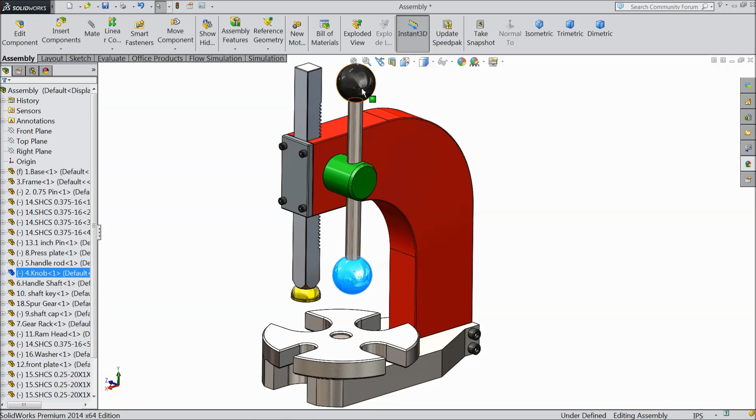This is the widely used manual press machine. We will design each part and assemble them at the end of the video. Let's see how to do this in Solidworks. You can also find the JPG file on our Facebook page. So let's do it.

Here we will make the first part, the base for our Arbor Press. We will select the top plane, sketch, draw one construction line and make sure it passes through origin. Select line, connect with this, exit. Now we will assign the dimension.

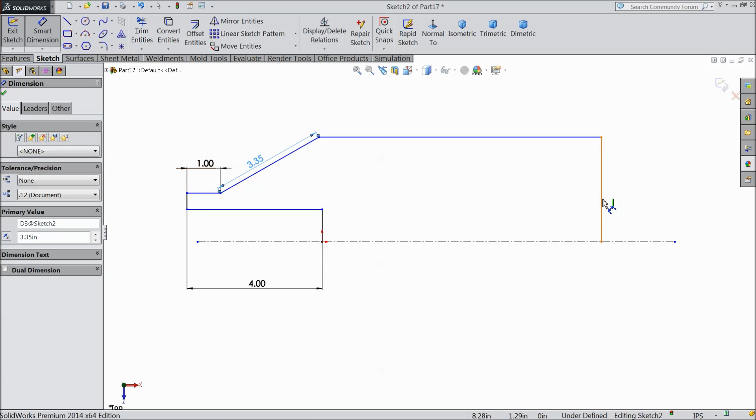Our dimensions are in inches. Make 1 inch, 4 inch, 3.35 inch, and the distance from here to one end 11.75 inch, and the distance from here to this line 3 inch, and the distance from this point 1 inch, and this distance 1.5 inch.

Now select circle and draw one circle here. Select a line, connect with this line, exit. Now choose trim entities and trim this portion.

Now let's assign the dimension. Keep 1 inch and this radius select 1.25 inch. Select trim entity and delete this line also here.

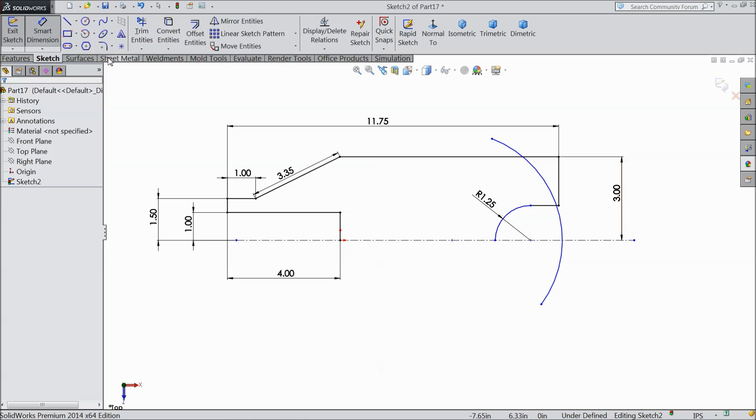Now select circle and draw one more big circle, or cancel it and choose center point arc here. Now draw an arc from here, exit. Now assign the dimension. The gap between these two is 2.5 inch and keep the radius 4 inch. Now trim this outer part. Now that's it.

Now select all the geometry, select mirror and select this line, and we want to make a mirror, so select OK. Now this body is going to be mirrored.

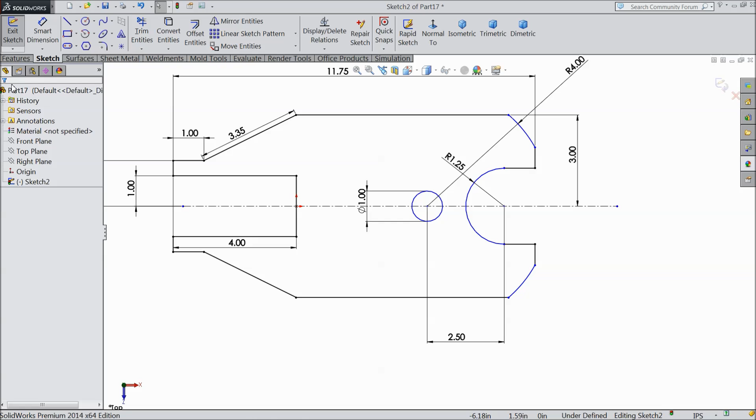Select circle and draw one circle here and make the diameter 1 inch. Now this distance from here is 1 inch. Now our geometry is fully defined.

Select extruded boss and extrude up to 1.5 inch.

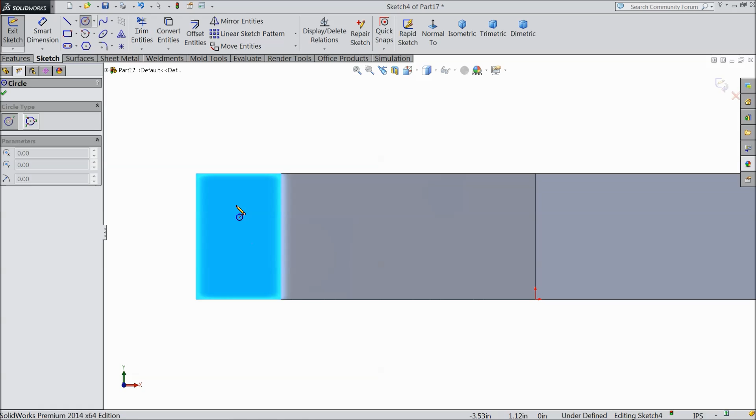Now select this face, sketch normal, and here we want to create some circles. First draw a center line. Now let's assign this circle: .35 inch, and the distance from here 0.5 inch, and the diameter keep 3/8 inch.

Select mirror entity and mirror this circle about this construction line. Now select extruded cut and select through all. Okay, we will select some chamfer, .01, select this face, this face.

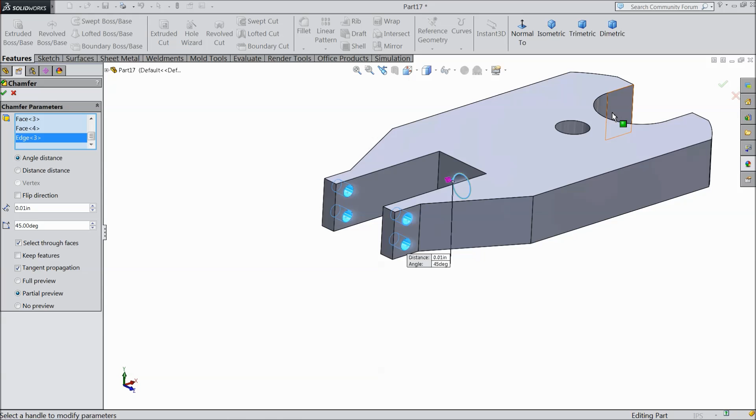Now our first part is ready. This is the Arbor Press base. We will assign some material like let's do it, brushed steel. Now save as. Go to desktop and create a new folder and name it Arbor Press.

Arbor Press Machine, and save as first part base. Okay, let's go for the next part.

Now we will sketch the 0.75 inch pin. So we will select front plane, sketch, and draw a circle and keep the diameter 0.75 inch. Extrude it up to 1.5 inch. And make chamfer 0.05 inch and select both the ends.

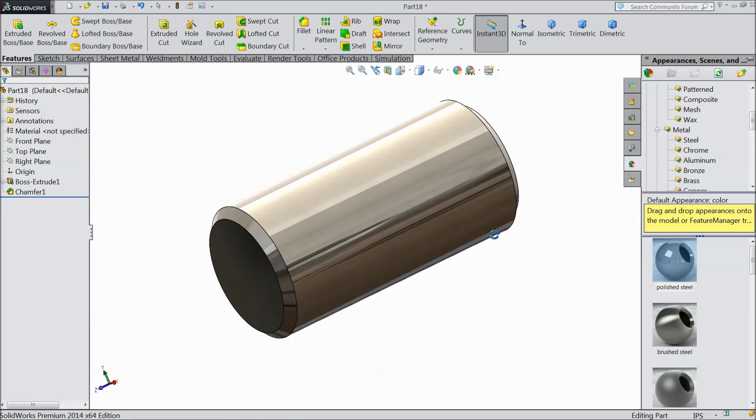Let's assign polished steel for the whole body. This is the pin for the Arbor machine. Now save as .75 inch pin. Okay, let's move to the next.

Now we will sketch the Arbor Press frame. Choose front plane, sketch, select a line and start from the origin point, now exit. Let's assign the length and height, everything.

Keep 14-inch height, 11.25-inch width, 4-inch width, and here also 4-inch. Now choose fillet, keep radius 6-inch and select this end. Now change to 4-inch and select this end.

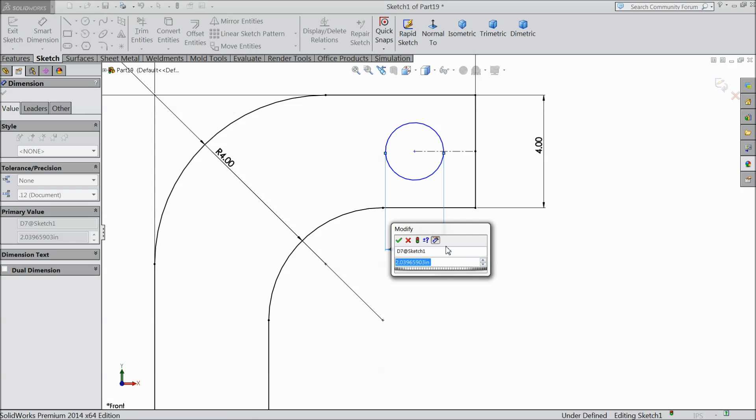Select circle. Draw a circle, select center point and connect it from midpoint. Exit. Now select this midpoint and make relation horizontal. Keep the diameter of the hole 1.63 inch and the distance from here to one end 1.686 inch.

Now select extruded boss and choose mid plane here, and extrude up to 2 inch.

Now select this face, sketch. First draw a center line. Exit. Now choose corner rectangle and draw one rectangle. Exit. Now select these 3 lines and make relation symmetric. Assign the length 0.01 inch and the distance from one end, by default, 0.5 inch. Select extruded cut, we want to cut inside up to 1.01 inch. Now see here.

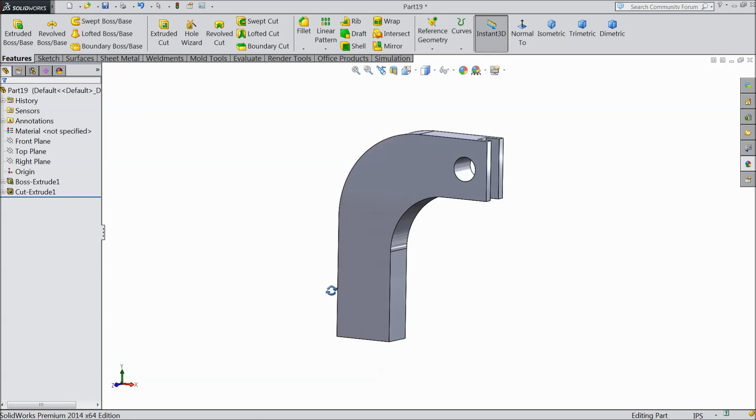Now we want to create some holes here. Select this face first, normal, and choose hole wizard. And here we want to create some hole. So choose straight tap here, inch, and this tapped hole.

And here we will select 1/4 into 20 size hole and choose blind and select 0. Blind inside select 1 inch and this one select 0.75 thread.

Okay, now choose position. Here we want, okay, now escape, press escape, assign dimension, .25 inch, and this height 0.5 inch.

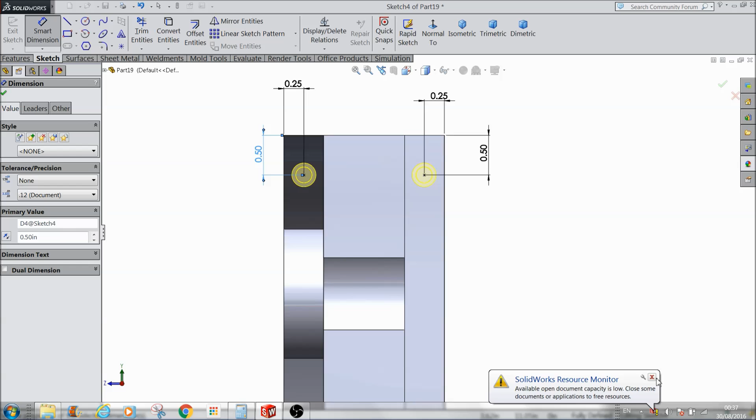Now the same as here also: 0.25, .5 inch.

Now select this face, sketch, select center line, exit, and we want to mirror this hole to another direction. So select, sorry, exit.

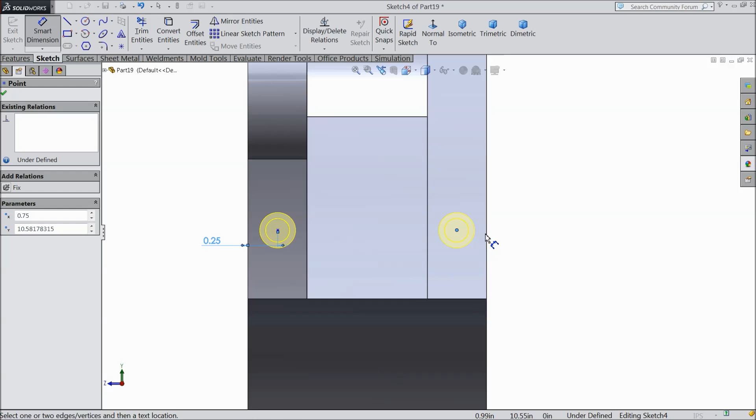Delete this line, or no problem if you can keep it as it is. Mirror. Or we will do one thing, just delete this line and edit this feature. Now go to location, and draw two more here, press escape, same also. We can use 0.25 inch, 0.25 inch, 0.5 inch.

Okay, now select OK. Now see the 4 holes here we created. Now the same as we will create here, select this face, sketch, normal, only select this face and choose hole wizard.

Now choose the same straight tap, inch tap, and here you have to select a little different, 3 by 8 inch, 3 by 8 inch 24, blind, choose through all. Here select through all, position 1 2, escape.

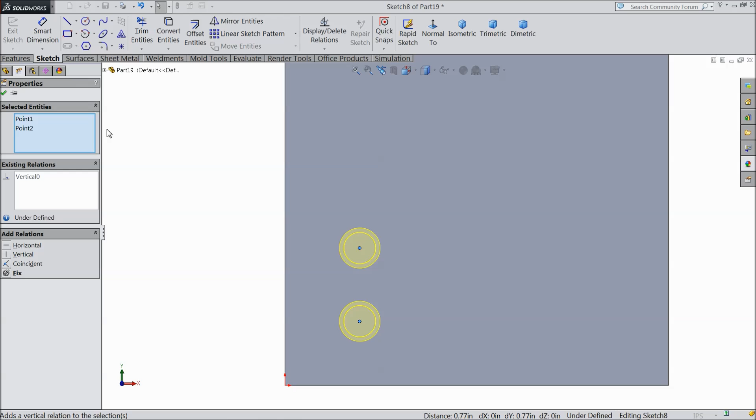Now let's assign dimension, escape first, select this center point and this center point, same vertical. Now assign the distance from this point, 0.5 inch, and the distance from here to here, 0.35 inch, and this distance 0.8 inch. Something went wrong, that's why this pop-up coming.

Select OK. Now see the holes created here.

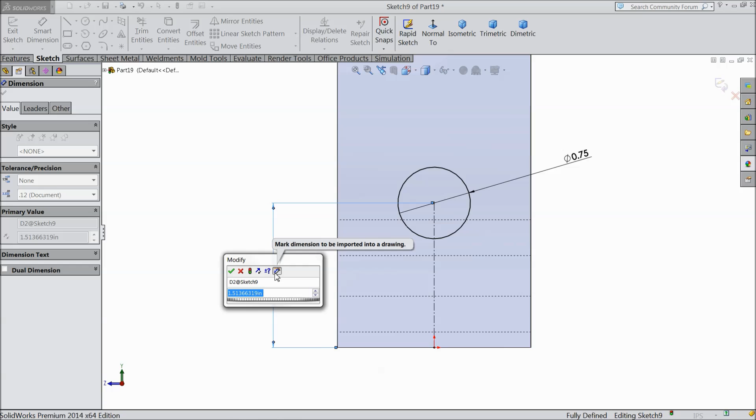Now we want to create a hole here, select this face, sketch, normal, select circle and draw a circle, connect one line with origin point, select this line and make sure it is vertical, 0.75 inch, and the distance from bottom line 0.75 inch.

Select extruded cut up to inside 0.75 inch. Okay. Now choose chamfer, select 0.05 inch and select this face, the same as opposite direction. Select OK.

Now this is the frame for Arbor Press. Let's assign the color. Select the body. OK. Now this is the press. Now save as frame. Okay, let's move for the next part.

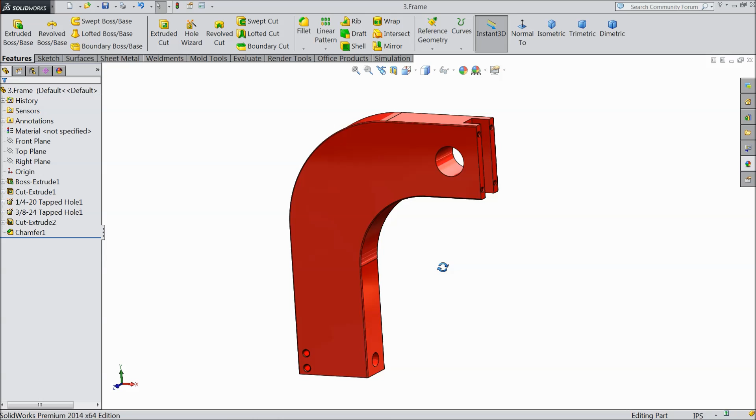Now the next part is handle knob. So choose front plane and draw a circle. Actually select center point arc and draw a half circle. Exit. Choose line and connect it and assign the radius 1 inch. Select revolve boss base and select this line as axis.

Okay. Now again choose front plane and we want to create a plane, so select this upper face. It will be tangent to this face. Okay. Now select this plane, sketch, and draw a circle here and keep the diameter 0.75 inch. Okay, and extrude up to inside 0.75 inch. Okay.

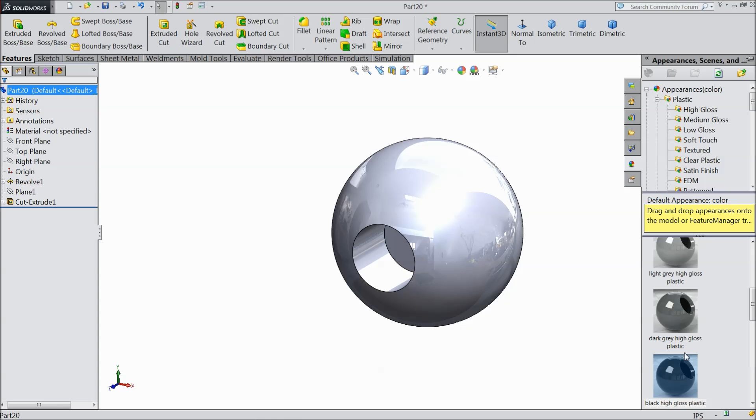Now hide this plane. Now we will assign black high gloss plastic for this knob. Now save as knob. Let's move for next part, handle.

Let's make handle rod. So choose front plane, sketch, and for rod create a circle and keep the diameter 0.75 inch. Okay, and let's extrude and choose mid plane and we want 10-inch long rod. Okay.

Now save this rod. We will assign some metal finish. Okay, polished steel or brushed steel, better. Now save as part number 5, handle rod.

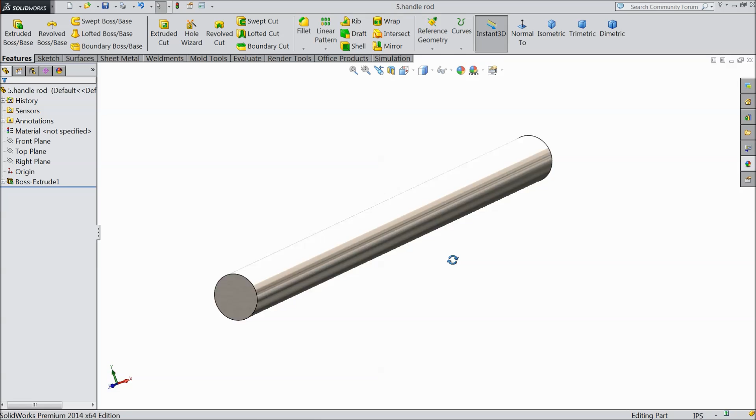Okay, let's move for the next part. Now we will make handle shaft. So choose front plane, sketch, select a line and start from origin point. And connect it again up to origin, exit.

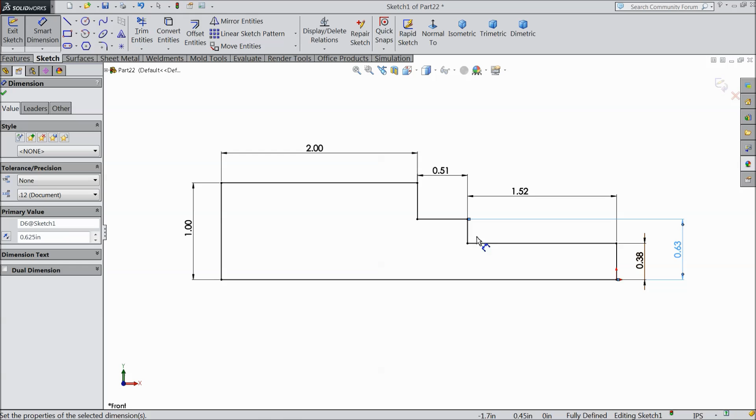Now let's assign the height and width everything. Make 1 inch, 2 inch, and this 0.51 inch, 1.52 inch. This height 0.375 inch, and this height 0.625 inch. Okay, now our geometry is fully defined, so select revolve boss base.

Okay, now choose chamfer 0.125 inch and select this end. Okay, we need one more chamfer 0.05 inch and select this end. You can choose fillet 0.015 and select this inside circle. Okay.

Now again choose front plane, sketch, and here we want to create a hole, so draw a hole and keep the diameters 0.75 inch, 0.75. Okay, and select the hole center point and origin point and make a relation horizontal. Now select extruded cut, and here we will select through all both. See, okay, now the hole is created.

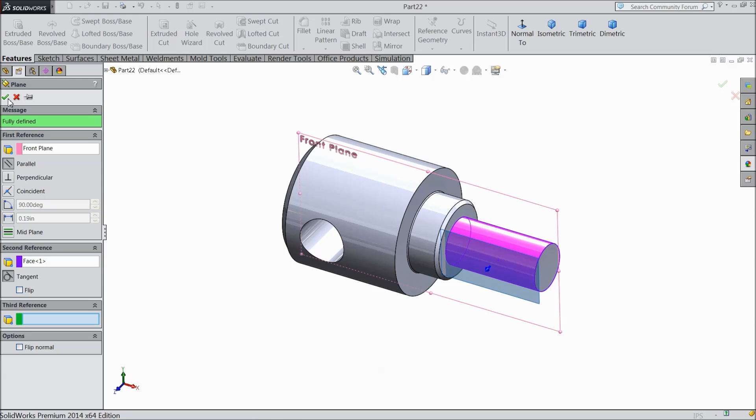Now we will select front plane, choose plane and select this axis, make parallel. Okay, now here we want to create a slotted key, so choose OK.

Now select this plane, sketch, normal. First draw a center line up to this line. Now select here a straight slot, make one slot. Okay, now select this outer line and this slot, this tangent.

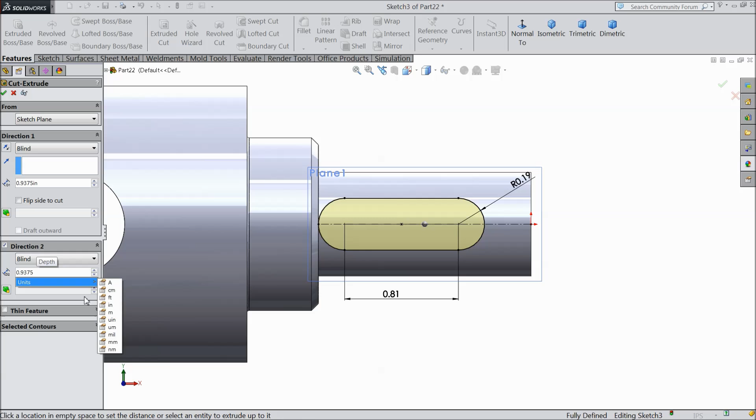Now we will define the length. 0.8125 inch, and this radius 3/16 inch. Okay, now select extruded cut, 0.9375, and direction 2 also the same, 0.9375 inch. See,

it is actually 0.09375 inch. See, you can see it here. Okay, now see this is actually slot for key. Now choose fillet 0.015 and select this circle. Okay,

now hide this plane, and we will assign some color. Okay, this color better. Now save this part number 6 as a handle shaft. Okay, let's move for the next part.

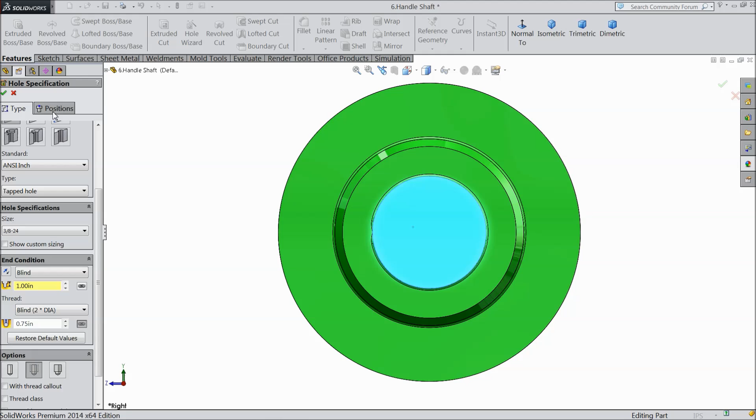We forgot to add some hole here. Select this face and go to hole wizard. Select straight tap, inch, hole, and here 3/8-24 inch. Okay, and blind, choose blind 0.75, and here select blind, select 1 inch. Better. Select position and choose center. Select OK. Now see, a hole is created. Now save this.

And we will do some editing here. This extruded cut, edit, and select this radius, and this one divide by 2. Okay. Exit. Now see, this is our small slot, not that much big. Now save as. Now our handle shaft is perfect. Let's move for the next part now.

Now we will sketch the gear rack. Choose the right plane, sketch, select center rectangle and draw one rectangle, keeping the length, height and width 1 by 1 inch. Select extruded boss and extrude up to 10 inches.

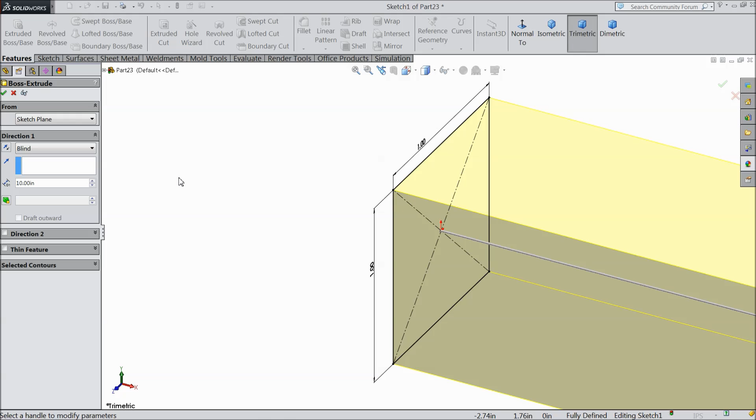Select OK. Now choose chamfer, 0.03, and select all 4 faces. Okay.

Now select this face, sketch normal. Here we will create some gear teeth. Choose a line and connect up to here. Select center line, exit. Now select these 3 lines and make relation symmetric. Now let's assign some dimensions.

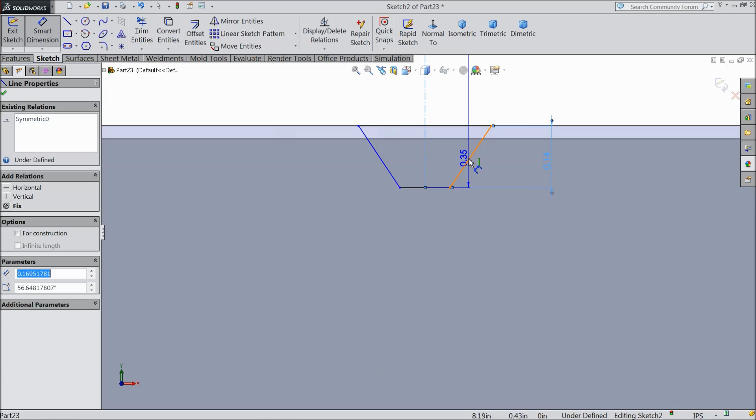Height, make it 0.1416, angle 14.5 degrees. Choose radius 0.02 and select this end and this end.

Now this is selected. The geometry is not fully defined, so we will add some more relations. This point to this point, make sure it is horizontal. Now let's assign the gap, 0.0708, and keep the length 0.1079 inch.

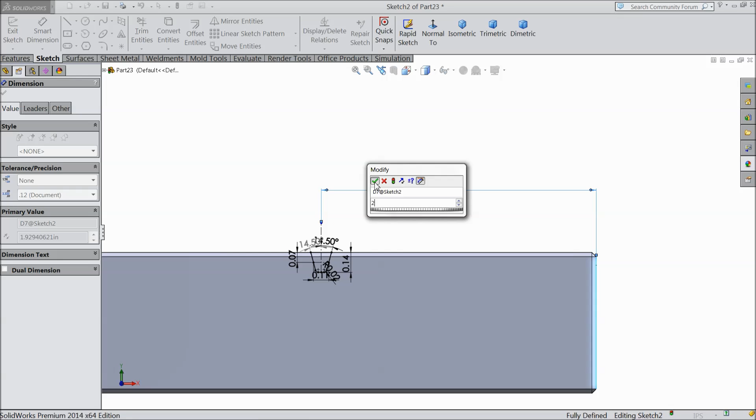Select OK. Now assign the distance from here to the last point, keep 2 inches. Now our geometry is fully defined. Select extruded cut and choose through all. See here, okay.

Now select this last cutout and choose linear pattern. Select this as an axis. Assign the distance 0.19635 inch and total 41 number of threads we want. See, there is a small gap between two threads.

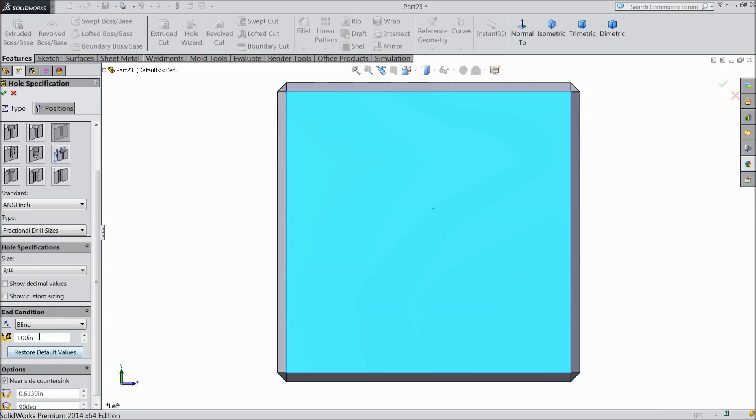Now we will do one, then select this face, sketch, only select this face. Here we want to make some hole. Go to hole wizard, choose hole and fractional drill size 9/16, blind, keep 1 inch, and select midpoint. Okay. Now see, the hole is created here.

We will do one more editing. We will just increase the length here, up to 12 inches. See, okay. Now that's fine. Now select this face, normal.

No, select the top face, normal, hole wizard, choose straight slot and tapped hole, size 1/4-20 inch. Go down and end condition choose up to next. Select position, make sure it is parallel to the origin point.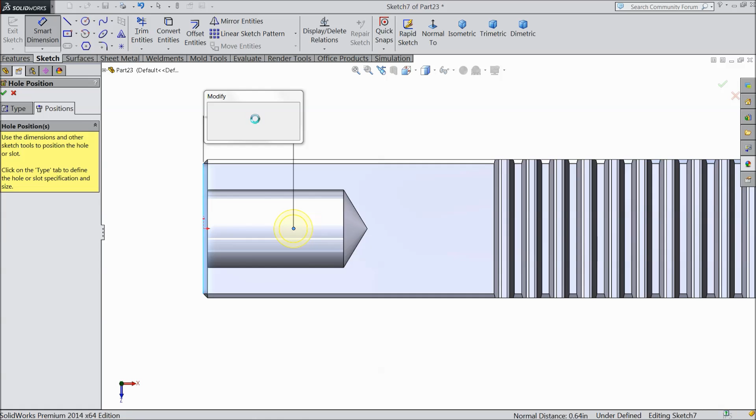Just escape and choose dimension, 0.5 inch. Select OK.

Now choose front plane, sketch normal, select a line, okay. Now select this line and this point, or better drag down, make this relation.

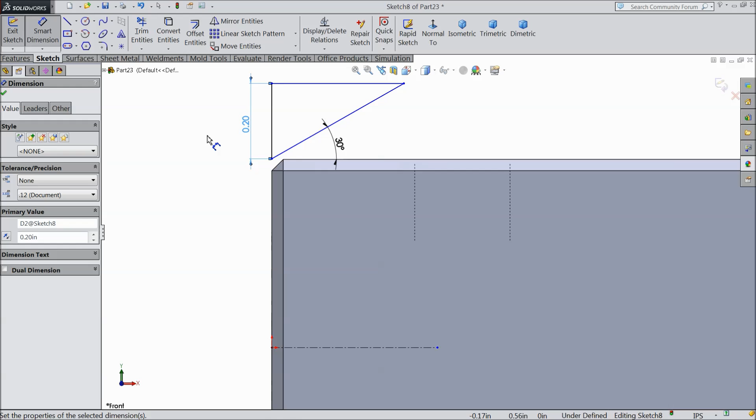Draw one center line. Now assign the angle between these two lines, 30 degrees, 0.2 inch. Now select revolve cut, with this line selected as the axis. Okay. Now see, it is created.

Now just select chromium plating. See, this is the gear rack for Arbor Press. The press will move up and down through this gear rack. Now save as gear rack. Okay, let's move to the next part.

The next part is the press plate. So choose the top plane and draw two circles, keeping the inside circle as construction geometry. Now assign the diameter: outer diameter 8 inches and inside 5 inches. Okay.

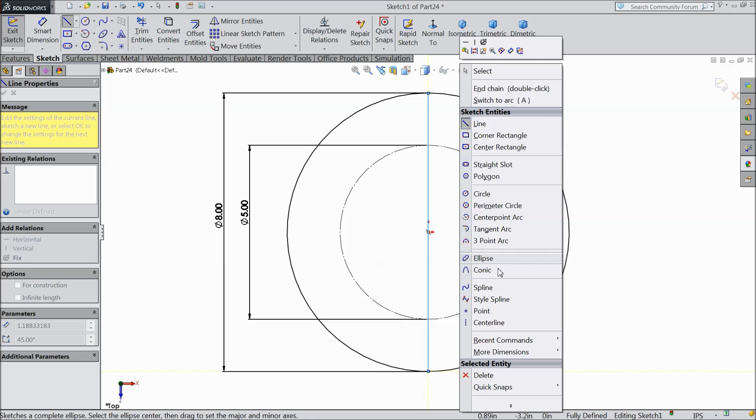Now select line, construction line, connect one end to this end, make sure it is construction geometry, the same as horizontal also. Now choose circle.

Now in every 4 corners define different sizes of circles; every circle has a different dimension. This circle keep diameter 2.5 inches, 2 inches, and the other one 1.5 inches, and this last one 1 inch. Okay, and define: select circle, draw a circle at midpoint, and this also keep 1 inch.

Okay, now choose a line and select this point and connect with it. Choose mirror entity, select this line and mirror about this line. Now here also draw a horizontal line up to this circle. You can mirror or you can sketch also by line.

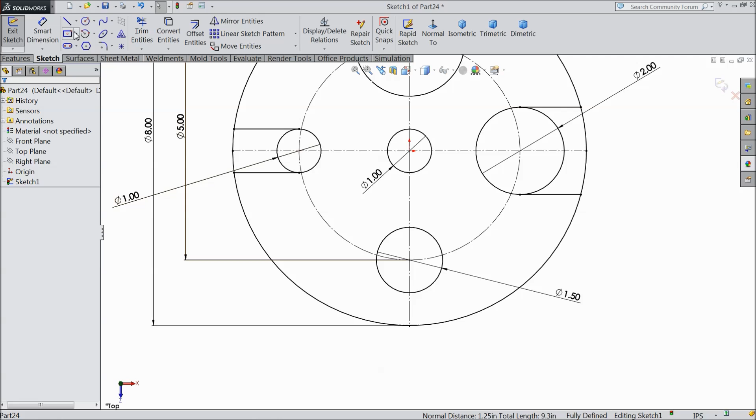Here also we will do the same thing, and the last one at the bottom. Connect with the circle and select both lines and click only mirror entities. Now see, it is automatically connected. Now choose trim entity. Now we are going to trim all the unnecessary things, we don't want this all. The same as upward. Okay.

That's it. Now select extruded boss and extrude up to 1 inch. Okay. Now define chamfer, select upper face and bottom face. Okay.

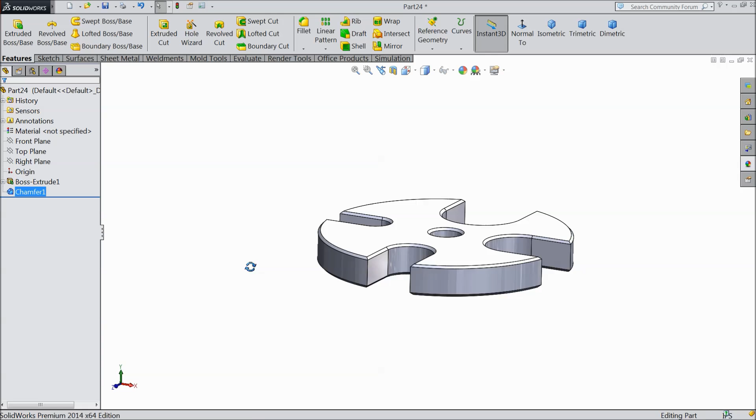Now we will assign some material: cast stainless steel. This is the cast stainless steel. Now save as part number 8, press plate. So this is the press plate. We will see how to assemble during assembly.

The next part is shaft cap. So choose front plane, sketch, select a line and start just below the origin point.

Exit. Now let's assign the dimension. First draw a center line, a horizontal center line. Make sure it's horizontal.

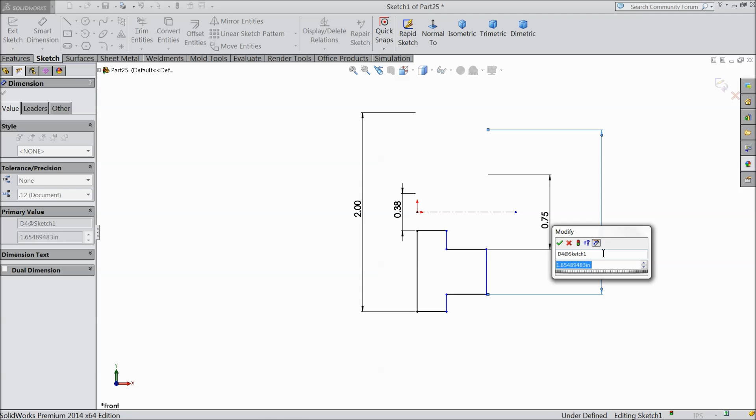Now overall length 2 inch, this length 0.375 inch. Now this length defined 0.75 inch, and the last one 1.625 inch.

Now 0.25 inch, and here bottom 0.375 inch, and the overall length, or cancel it, make relation collinear. Okay. Now our geometry is fully defined.

So select revolve boss base. Okay. Assign chamfer. Select this end and the last one. Okay.

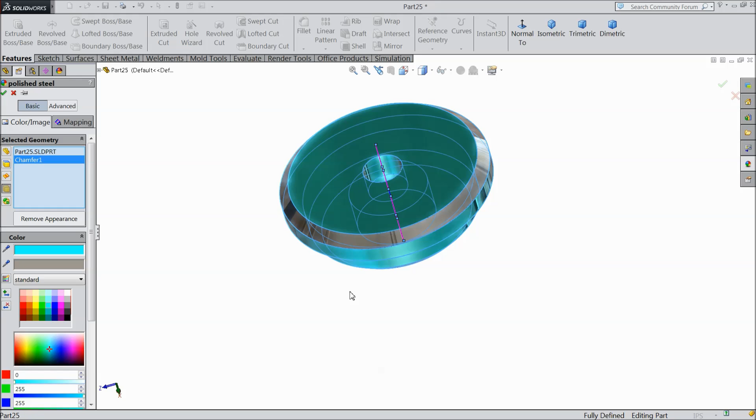We will assign polished steel for the whole body, and we will assign some different color.

Now save as shaft cap. This is, I think, part number 9. Now we will define and make the shaft key.

The next part is shaft key. So choose top plane, sketch, and here select straight slot. Draw a slot horizontal. Now select this line and make sure it is horizontal.

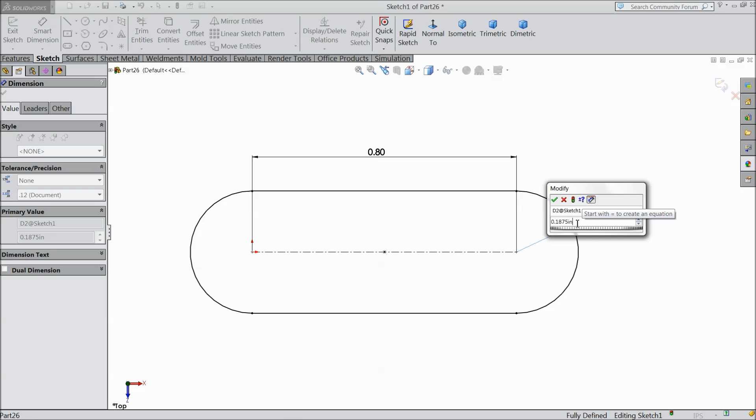Now define the dimension and assign 4 by 5 inch. And this one decide 3 by 16 inch. No, again divide by 2. That's it.

Now select extruded boss. Now extrude it 3 by 16 inch. Now this is better.

Okay. Now we will assign a small chamfer 0.005 inch. Select top and bottom face. Now select the whole body and define some color. That's it, orange color.

Now save this part as a shaft key, three by 16 inch. Okay, this is the shaft key.

Okay, let's move on to the next part. The next part is ram head. So choose front plane, sketch.

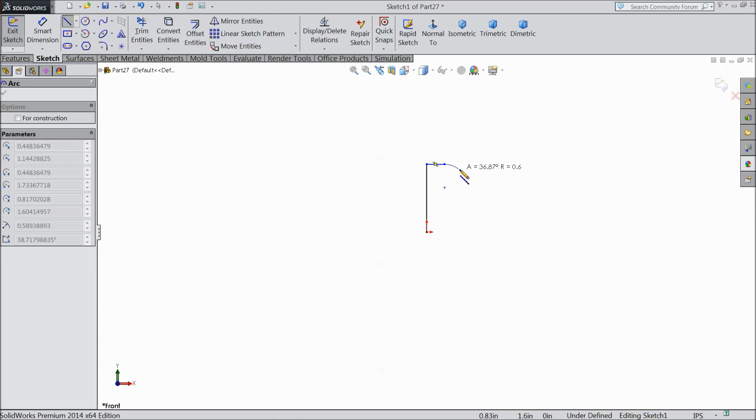Select line, go back and draw a circle, then a straight line down, and connect with this line.

Now here we will define some dimensions. Now select the length from here, or cancel it, select. OK. Zero, 0.75 inch.

Zero 0.263 by 2 inch. This one 0.5625 by 2 inch.

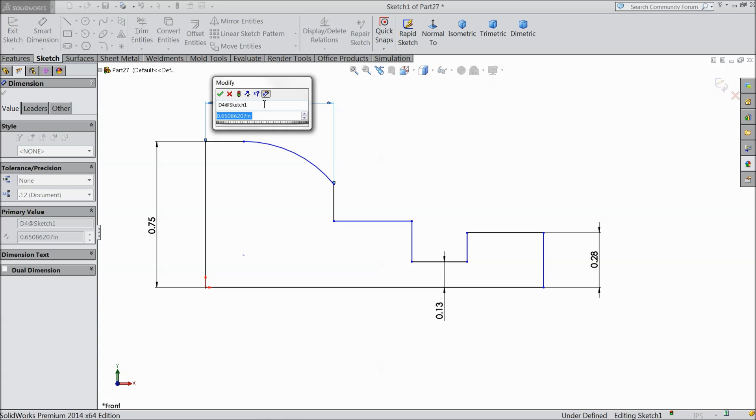Okay. Now this distance 0.625 inch. The radius also 0.625 inch. And the distance from here to this point 1 inch.

This distance 0.25 inch, and this one cancel. This length delete it.

Now first define this one 0.375 inch. Now distance from this end to this end 1 inch. Okay. Now select this line and make relation collinear. Okay. Now define this length 0.125 inch. Okay. Now our geometry is fully defined.

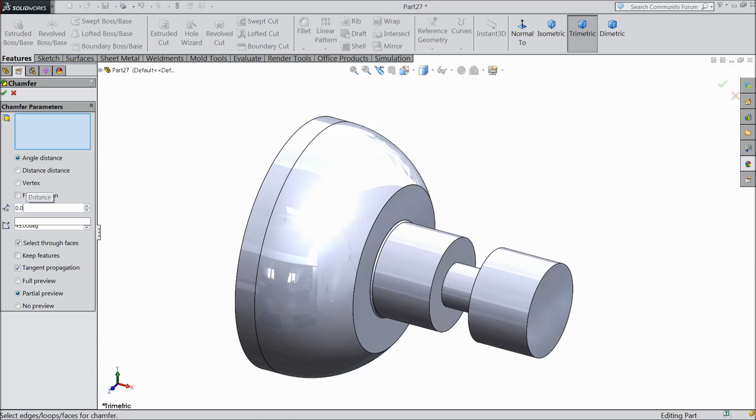So select revolve boss base and select this line as the axis. Choose chamfer, fillet, select this inside circle. Okay. Choose chamfer and select 0.05 and select this face. Okay.

Now we will assign some polished finish material and yellow color. See, it looks a very nice color. So this is the ram head for the press machine, Arbor Press.

Now save as ram head. Okay, let's go for the next part.

The next part is front plate. So choose top plane, sketch, and select here center rectangle. Keep the height 2 inch and 4 inch. Okay. Now select extruded boss and extrude up to 3 by 4 inch.

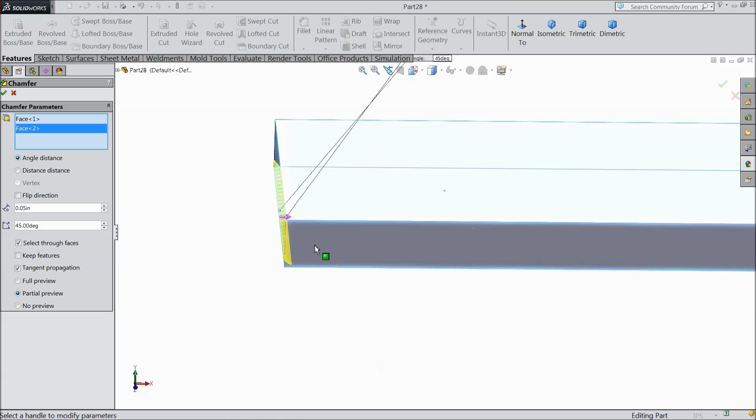Now first select chamfer. Select this face, and we will select all 4 edges. Okay.

Now see. Now select top face, sketch, normal. Draw one vertical line and one horizontal line. Draw a circle here.

Now define the distance 0.25 inch, 0.5 inch. The hole diameter 0.25 inch.

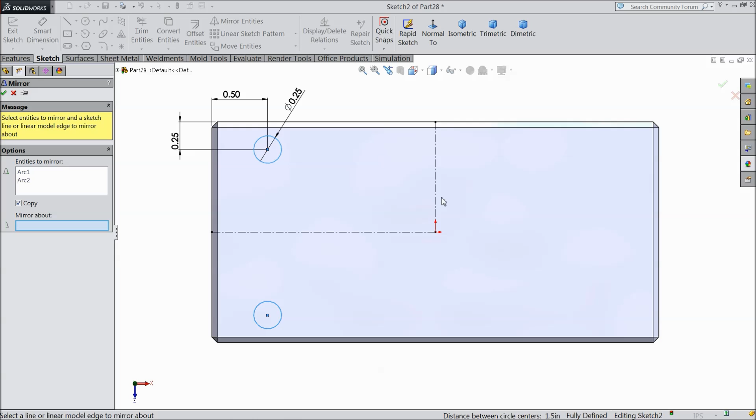Okay. Now choose mirror. Okay, again choose mirror. Select both the circles and mirror about this line. Select OK. Now select extruded cut and select here through all. OK.

Define some little dark color, not much dark, or define some plastic cover, polished plastic.

Now save as part number 12, front plate. Let's move for the next part.

The next part is 1 inch pin. So front plane, sketch, and draw a circle with 1 inch. Okay, and extrude up to 19 by 8 inch. It becomes 2.375 inch.

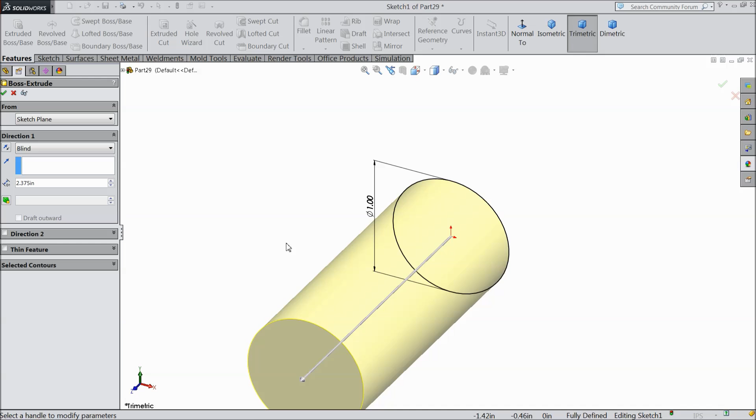Okay. Define chamfer 0.05 inch. Select this face. Okay.

Now assign steel and define the color black. Select the whole body. Okay. Now this is the 1 inch pin.

Save as part number 13, 1 inch pin. Let's move for the next part.

Now we will sketch one screw, a socket head screw. So select new and choose assembly.

And go to library, design library, and select inch, and in that go to bolts and screw and go down and select here socket head screw, and here select socket head cap screw.

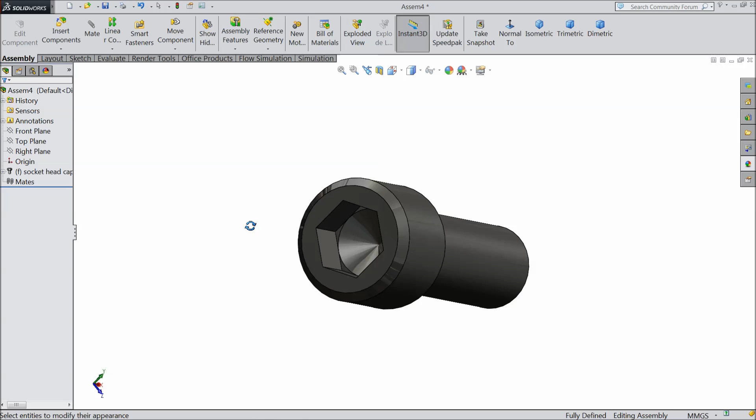Now we will save as, select here as a part, and this becomes part number 14.

Select here socket hexagon cap screw, 0.375 by 16 inch. Save. OK. Now cancel it, don't save.

Now we will sketch the next screw. Choose assembly. Cancel it and go to design library and select inch, bolts and screws, and select at the end socket head screw, and drag this socket head cap screw.

OK, and here we will select 1/4 inch 20. OK, length 1 inch, thread length also 1 inch. Select OK, select here no, and let's assign dark color to this body.

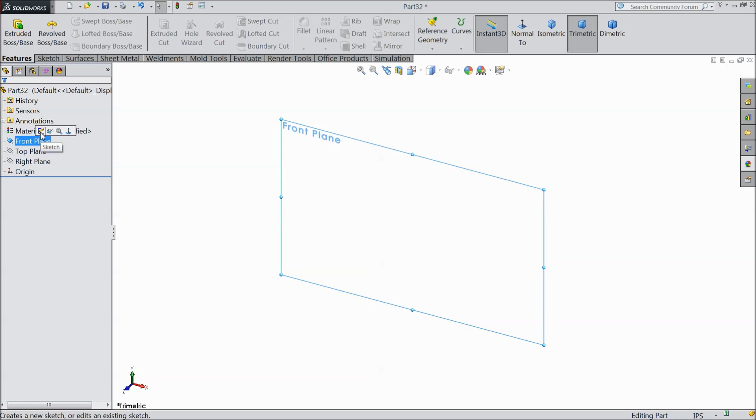Now the next part is washer. Select front plane, sketch, select corner rectangle. OK, select center line, make sure this line is vertical. Now let's assign the distance.

.812 inch, and the same this bottom also. Select yes. .406 inch, and select this width 0.065 inch. OK, and select this end point and origin point and make a relation vertical.

Now our geometry is fully defined. Select revolve boss base. OK, we will assign some color dark. So now this is the washer.

Now save as part number 16, washer. Save.

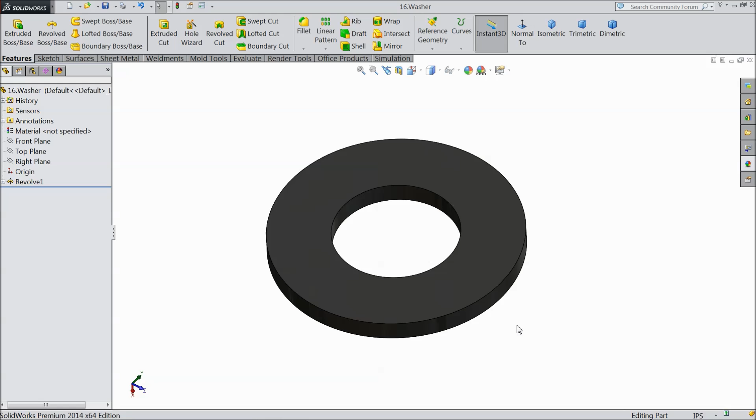Now we will sketch one socket head set screw. So go to assembly, and go to design library. Once you go to design library, select inch, and see bolts and screws, and go down, here socket head screw, sorry, here set screw socket, and here one set socket set screw cup point.

So just drag it here. Now here we will select 1 by 4 inch 20, length 0.75, 3 by 8 inch, hexagonal. Okay. So this is our socket head set screw.

We will assign some color to it, black color. Now save as, this is our last part, so save as parts. Socket sets, socket screw, cup type, and here we will select 0.25 by 20 into 0.375 inch. Save.

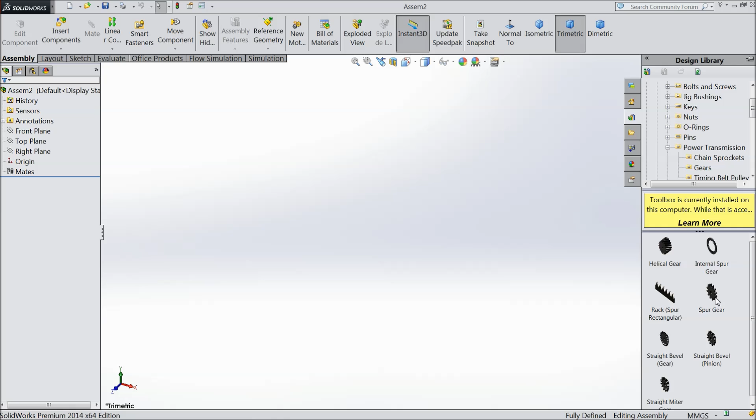Cancel it. And just go to design library. First select inches, and then go to power transmission, gears, and here one option is spur gear. Just drag it here. Here select diametral pitch 16, number of teeth 24, and pressure angle keep 14.5, face width 1 inch, and the nominal shaft diameter 3 by 4 inch.

Okay. Cancel it. Choose plane. Now we want to do some modification. Select this face, click here, sketch. Normal. Select center line. This is the center point.

Choose corner rectangle, up to this circle. Okay. Now select this outer line and construction line and make relation symmetric. Okay. Now define the length 0.1875 inch. Okay. Now define the distance from midpoint, it should be 0.46875 inch. That's it.

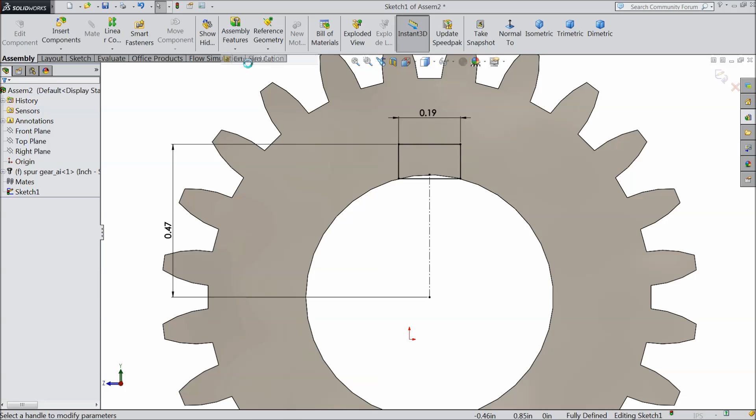Okay. Now we want to extrude cut. Here select extruded cut and select through all. Now see, it is cut through all. Okay. Now see.

Now save this gear, Arbor Press Machine, and save as a part, and this is the last part, 18. spur gear. Save.

Now this gear we saved as a part, so this geometry no need, so just cancel and select don't save. Now let's start the assembly of Arbor Press. So choose new, select here assembly. Okay.

Now we will browse our first part, base. Once base arrived, we will just do some settings. We will increase the image quality higher. Our sketch in inches.

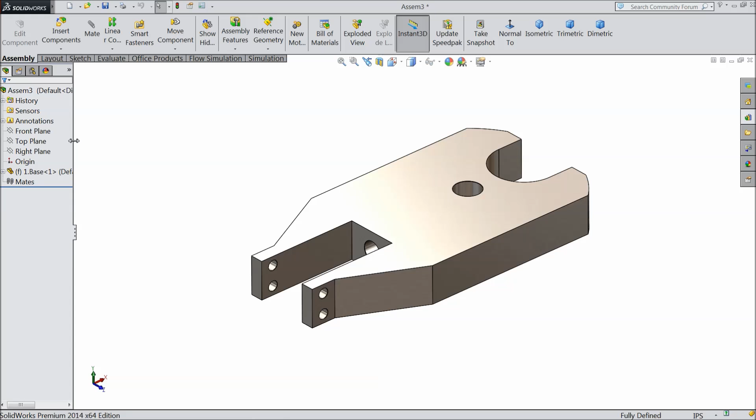Now insert the next component, frame. Insert one more component, 0.75 inch pin.

Okay. Now let's, okay. Now choose mate, select this pin and this hole. Okay. Now select this back face and this pin. Okay.

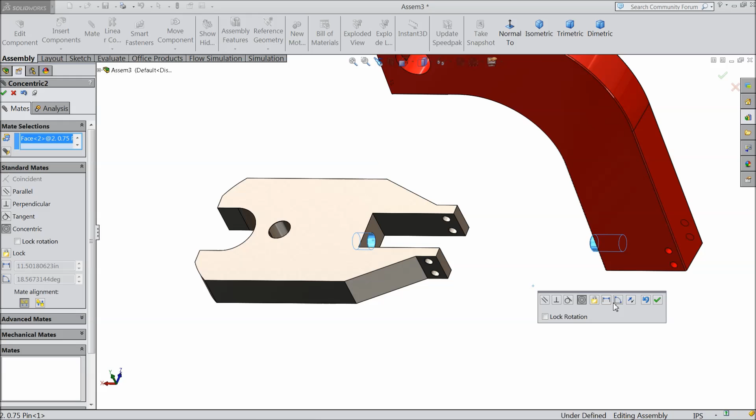Now see, it's gone inside. Just drag it here and rotate. Okay, now choose mate. Now select this inside hole and this pin. Okay, select this face and this face. Okay, now we need to make, see it is not aligned, so select this face and this face, parallel.

Okay, so now our geometry is aligned with base. Frame and base is fixed. We will bring some, select this point, nuts and bolt.

Select this upper face, mate, and this hole. Cancel it. First drag it here. Now choose mate and this hole. Okay. Now hide this, change transparency. Now take it out. Now change transparency.

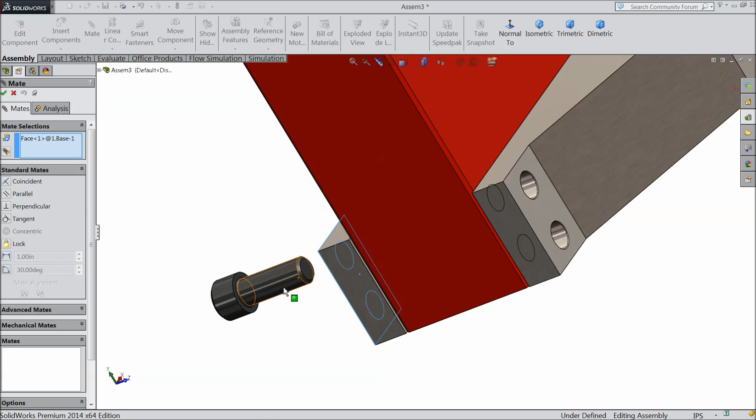Select this face, mate, and head face. Okay. Now we will just copy mate, copy with mate, select the component and here select the hole and select this face. Okay. Then again here also choose this hole, select this face. Okay, the same, choose hole and select this face. Okay. Okay. Now the 4 screws are fixed here.

Now we will browse our next component, 1 inch pin. Okay. Now choose mate, select this hole. Okay. Just go to bottom, select this bottom of pin and this base, coincident. Okay. Now this 1 inch pin is fixed.

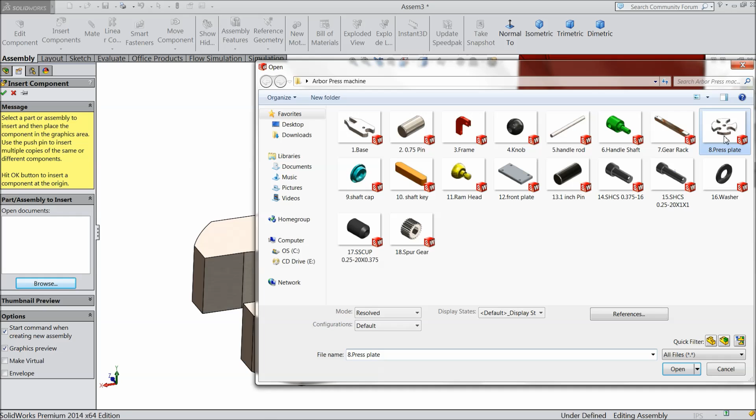Now let's browse the another component. Browse rod and browse the knob. Choose mate, select this rod and select this inside hole and make relation concentric. Okay.

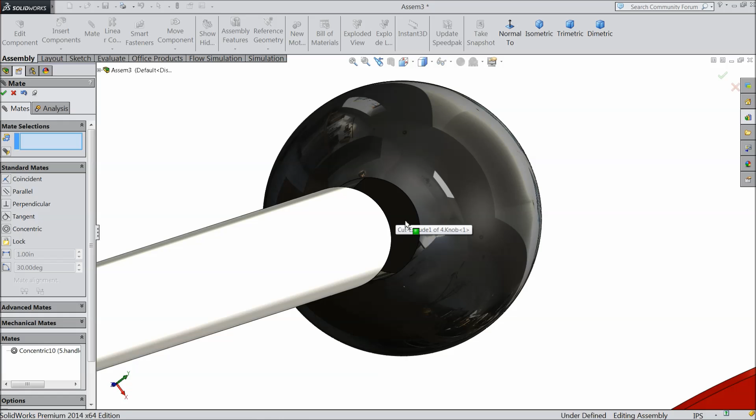Now there is, select this inside face and this face, choose mate. Okay. Cancel it. Select this front plane of rod and we will try to make reverse this knob. Just check where, mirror component. Select this knob and here select next. See the preview showing here. Okay, now the knobs are fixed.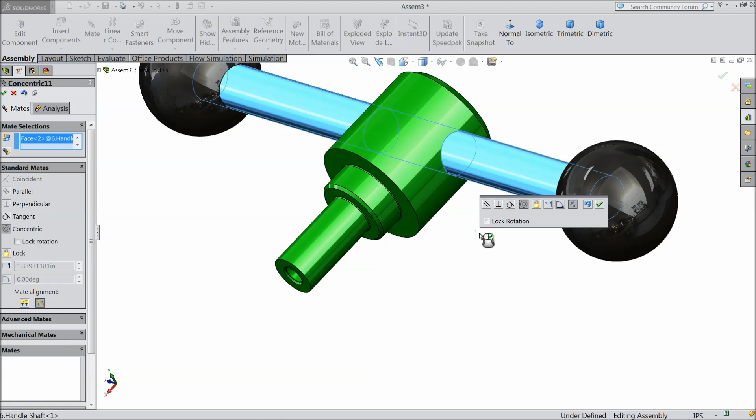Let's insert another component. We will bring handle shaft. Okay, now here we will fix this shaft inside this hole. So select the shaft, mate, and this hole. Okay, and we will assign some relation. Select the front plane of shaft and front plane of handle. Select mate. Now see the handle in the center of this shaft. Okay, okay, now just rotate this component. Okay, now insert the next part, shaft key.

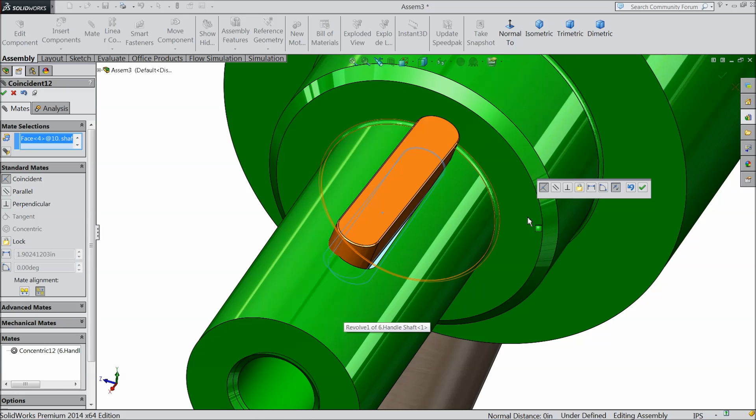Choose mate, select this face and this face, concentric. Now select this bottom face and the bottom face of key. See, it's going to select this face and the wall inside. Okay, now our key is fixed with the shaft, handle shaft.

Okay, now we will insert the next component, spur gear. Select this inside hole, mate, the shaft, concentric. And we will select this face and this face. Let's browse inside. Yeah, you can see it's almost the perfect place.

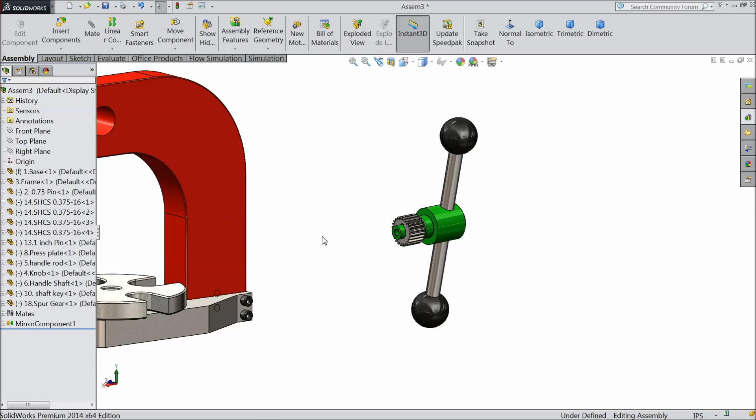Select. Okay, now we will insert our next component. Let's fix it. Select this face, mate, and this gear back face. Okay, now the gear is fixed with this handle and shaft. Now just rotate it.

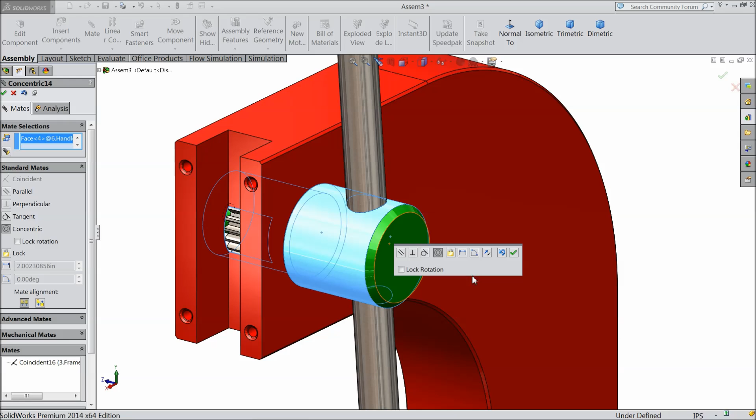Okay, now bring it here. Now just select mate, select this face and this face. Now select this hole and this face and make relation concentric. Now this is in perfect position.

See, it is rotating here. Clear. Now it will rotate. Insert next component. Choose shaft cap.

Choose mate. Select this inside shaft and this side, concentric. Okay, and we have to select this face, outer face, and we want to select inside face. See, it's gone inside. Okay, carefully watch all the mates. Sure it will help you.

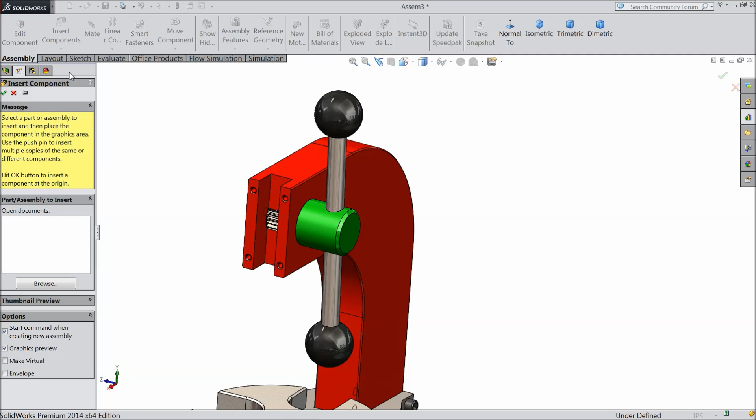Now insert the next component, gear rack. Okay, first just move it, make this hole downward direction. Okay, choose linear mate and select advanced mate.

Select this one side and the second side. Choose width, second side. These two sides selected. Now here, this inside, select one face and another face. Select OK.

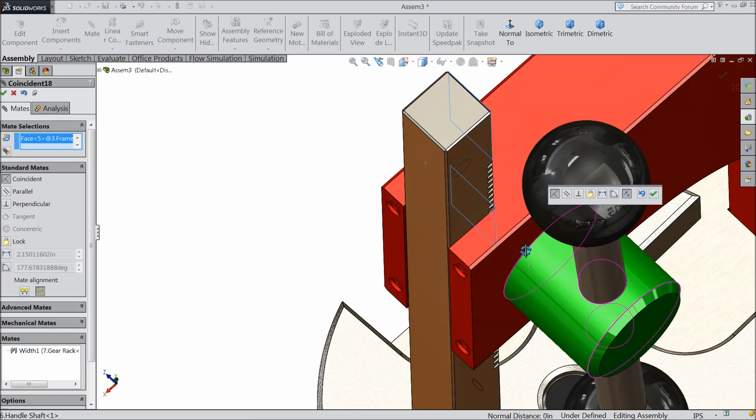Now select this face and this face. Go to mate. Clear. Now here the gear is mated inside. Select OK.

Now we should give a relation here. Now select this frame and click hide component. Okay, now here we have to assign some relation. Go to mechanical, choose rack and pinion. For rack we have to select one straight line, so we will select this straight line, and for gear we have to select one. This selected.

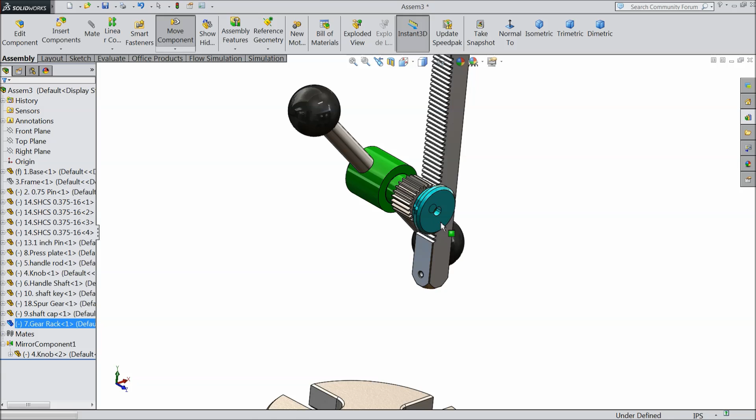Pinion pitch diameter, okay, 1.1 inch. Okay, now let's move up and down. See, the rotation is created. You can see the handle is rotating. So now our gear ratio is created.

Now select this show component. Change transparency. Now here we will assign some relation. Go to advanced mate. Select this face and this face. Select here distance. Here select 12, 19. This relation we will make 19 and the minimum 12. Okay, okay.

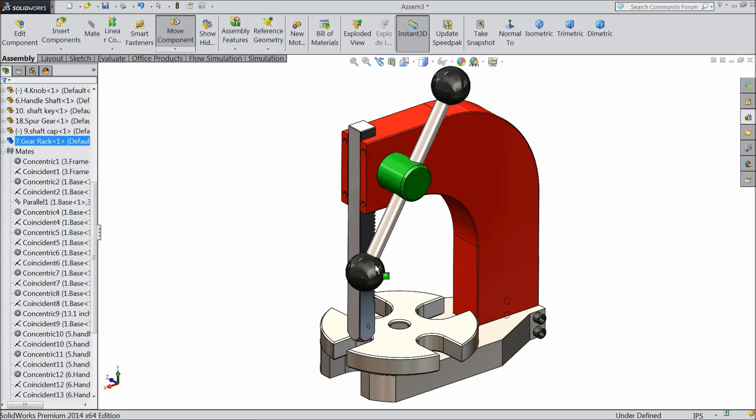Now see, okay, this is minimum. So now our relations are created. Now browse the next component. Arbor Press Machine, ram head.

This ram we will fix in, select this inside hole, mate, and choose this one, this hole. Okay, select this face and this face. Okay, now the ram head is fixed with gear mate, gear rack.

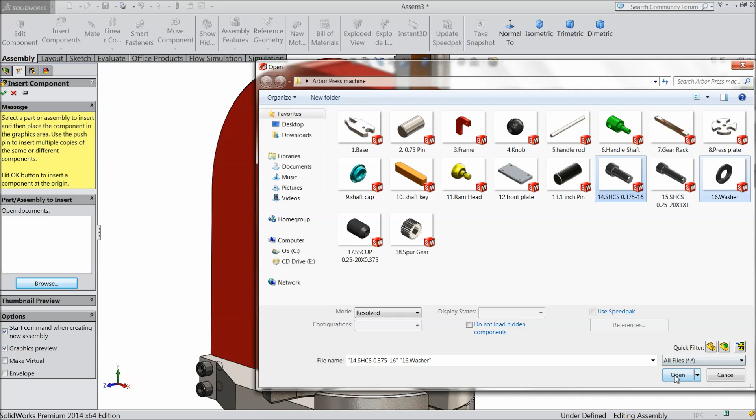Now insert washer and 16, this bolt. Select this face, mate, this face. Okay, this hole and this. Okay, now we will bring

inside hole, reverse mate, just hide the body and search where this bolt gone. Bolt gone inside, drag out.

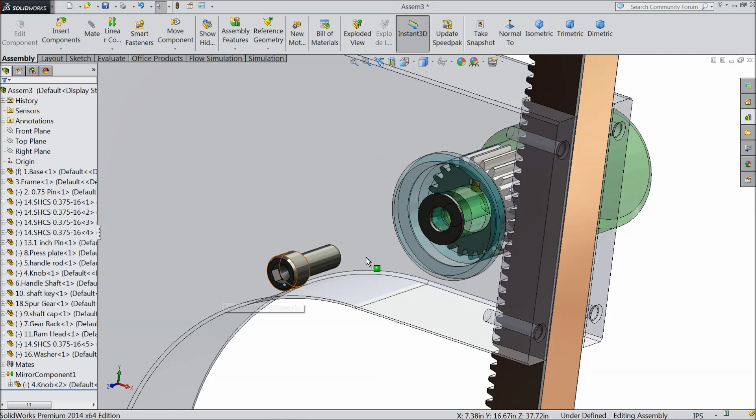Okay, now select this part, change transparency, that's it. This body also change transparency. Select this face or choose bolt head face, mate, washer. Okay, now here washer fixed.

Okay, now we will bring our next part, front plate. First rotate this front plate. Okay, select mate, select one hole and this hole. Okay, just take it out. Now again choose this hole and this second hole, mate. Now select this face and back face, mate here.

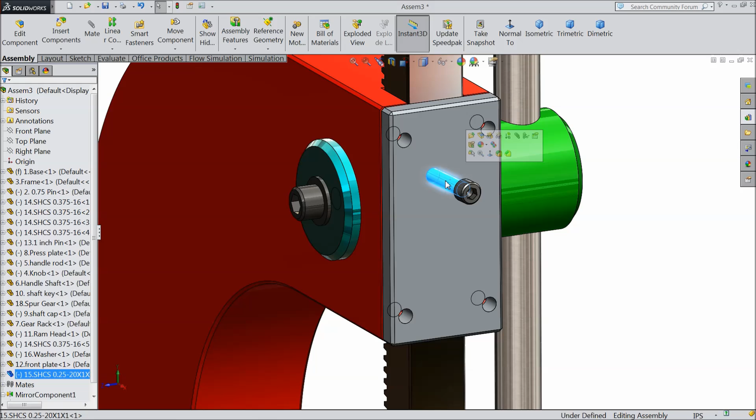Now browse the part number, 15, 0.25 by 20 inch bolt. First rotate it, is better. Okay, now choose this hole, mate, and this hole. Okay, back side of head and this plate.

Okay, now we will use copy with mates command to paste all in all places. Copy with mates. Select this component and select first hole and face. Okay, again choose a hole and face. Select OK. Now again choose this hole and the next face. Okay, now cancel. So now all the 4 bolts are fixed.

So I think all the parts are fixed here. If you change transparency, you can easily see how this Arbor Press is working. See, this is maximum and minimum. We allocate the maximum and minimum dimension. Select the body, change transparency. So our Arbor Press is ready.

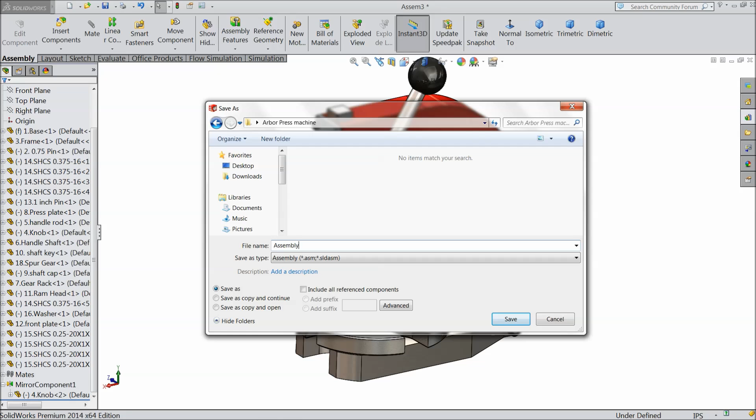Now save as press machine assembly. Now it's saved.

Move this handle and see the rack is going up and finish. It has limit for up and down.